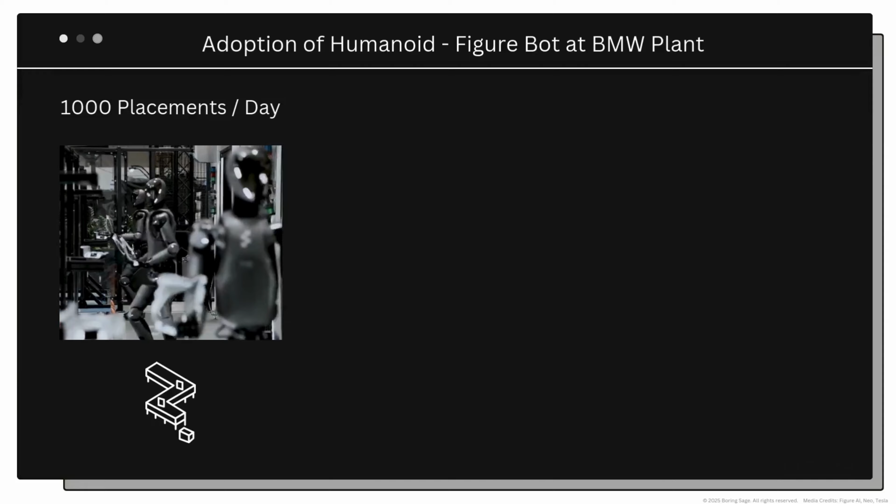From auto manufacturing plants to our homes, humanoids are gaining serious adoption. Here in the US, FigureAI bots are building the next generation of BMW cars. These are deployed in the Spartanburg auto manufacturing plant and are automating the assembly line at a galactic speed.

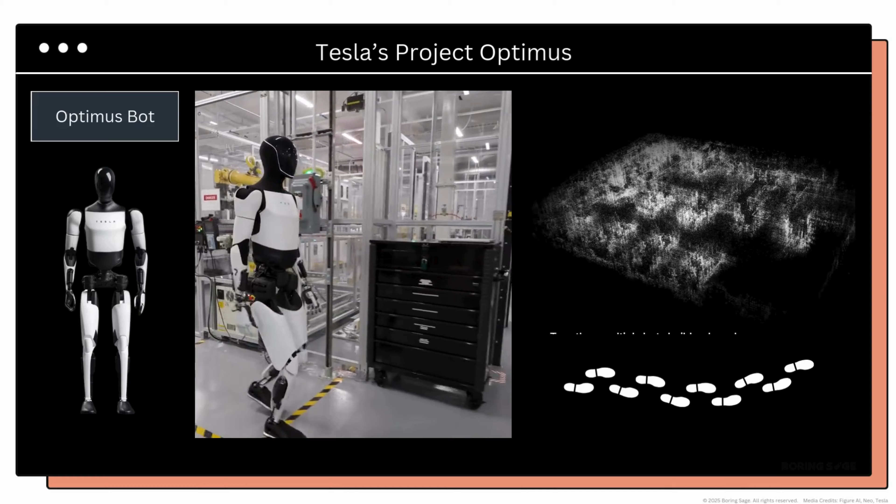Tesla is also joining the pack with its Optimus bot. It's being trained to automate the production line for the next generation of Tesla cars and the Cybertrucks. Germany, China, and South Korea are also leading this front with locally designed top tier humanoids.

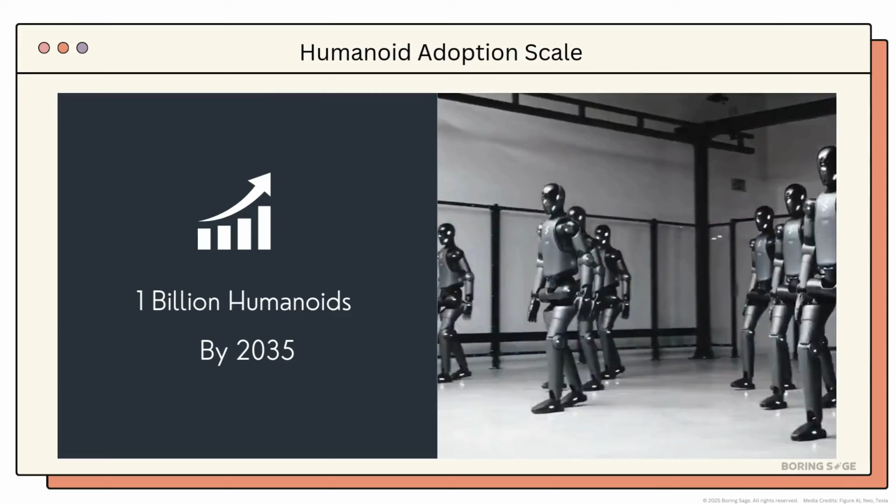It's estimated that around 1 billion humanoids will be deployed by 2035. 50,000 are expected to ship this year alone, each engineered by robotics teams around the world. Given this scale, it's worth understanding how humanoids work.

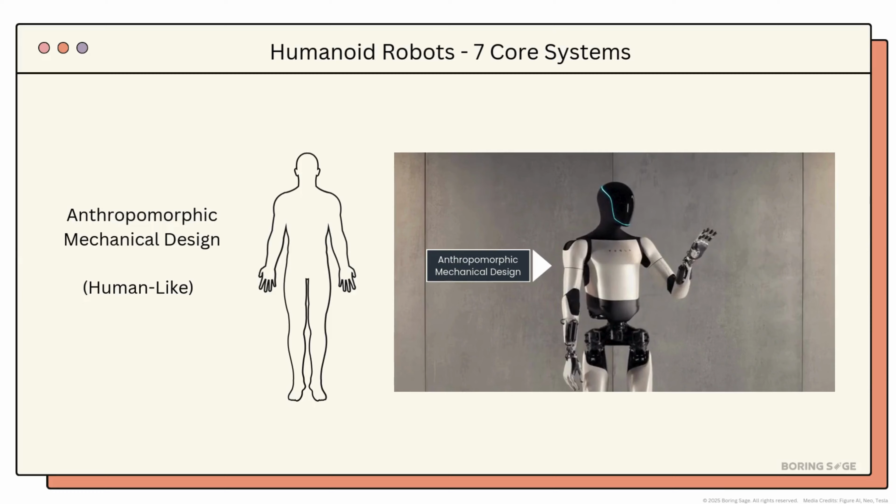If you take a look at humanoid robots today, you will notice their design and functionality can be distilled down to 7 core systems. What are these 7 systems? Let's cover each of them one by one. Well, the first one is anthropomorphic mechanical design, or in simple words, human body inspired mechanical design.

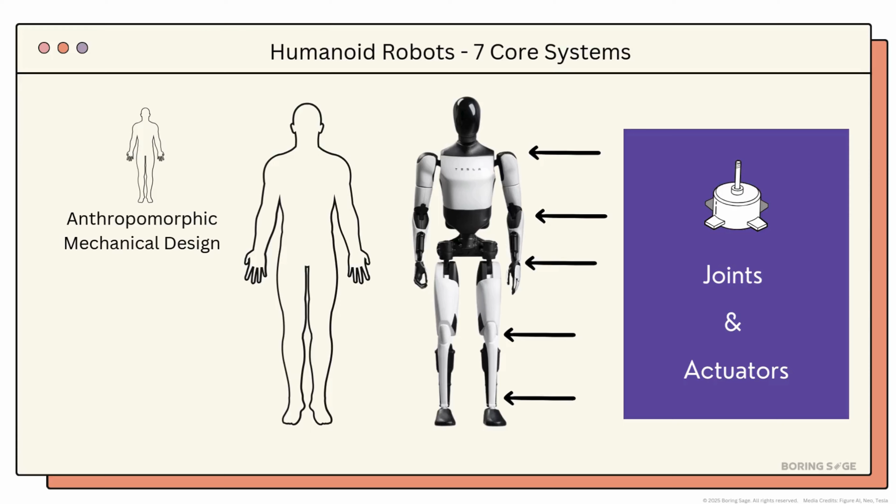At its core, a humanoid robot is built with a body plan inspired by our own. Each of these are equipped with one head, one torso, two legs, and two arms. Each limb is made up of multiple joints. These joints are powered by actuators, or in simple terms, high power motors that allow the robot to perform a wide range of tasks. To keep it simple, this mechanical design of a humanoid can be distilled into 3 subsystems.

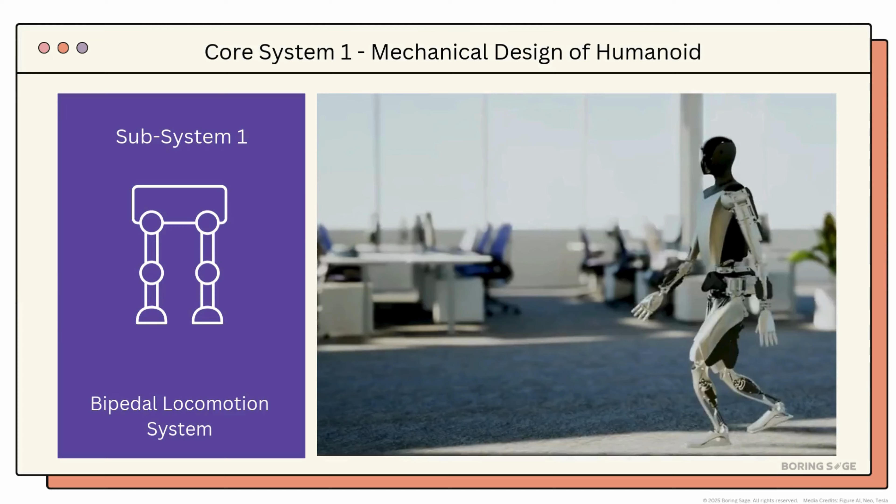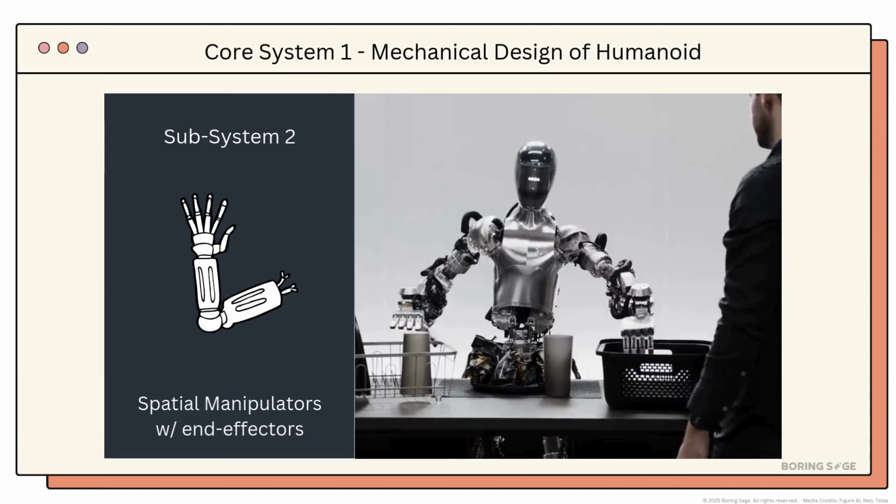The first one is the bipedal locomotion system, essentially a fancy way to describe the 2 legs that each of these humanoids is equipped with. The second subsystem covers the 2 spatial manipulators. These are essentially the 2 hands of the robot equipped with end effectors, or some call them grippers. A gripper is the technical term for fingers with human-like dexterity.

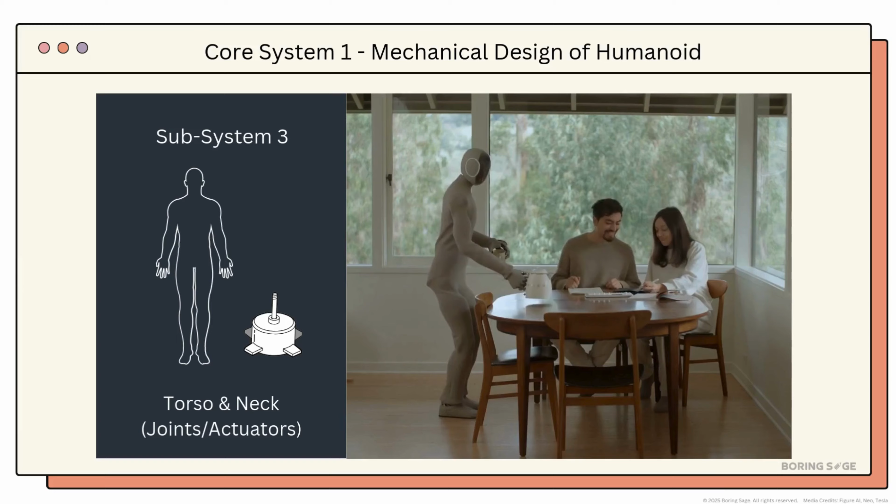Then, the third subsystem comprises the torso and the neck. Each of these subsystems are powered by actuators, or in simple words, high-torque motors. They play a key role in ensuring a humanoid has a reasonable range and stability. This mechanical architecture is carefully engineered for stability, endurance, precision, and agility.

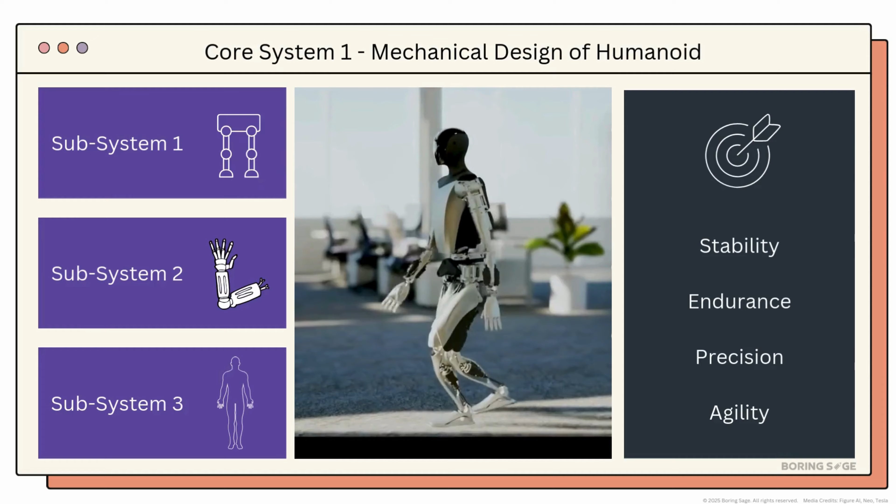Now that we understand the first core system, which is the mechanical design, we need to understand the second core system. Just because a humanoid robot is equipped with 2 mechanical legs doesn't mean it's going to be able to walk and retain its balance. It has to be trained to retain its balance. So the question is, how does it do that? How does a humanoid robot ensure that each step it takes is well calibrated so it doesn't fall?

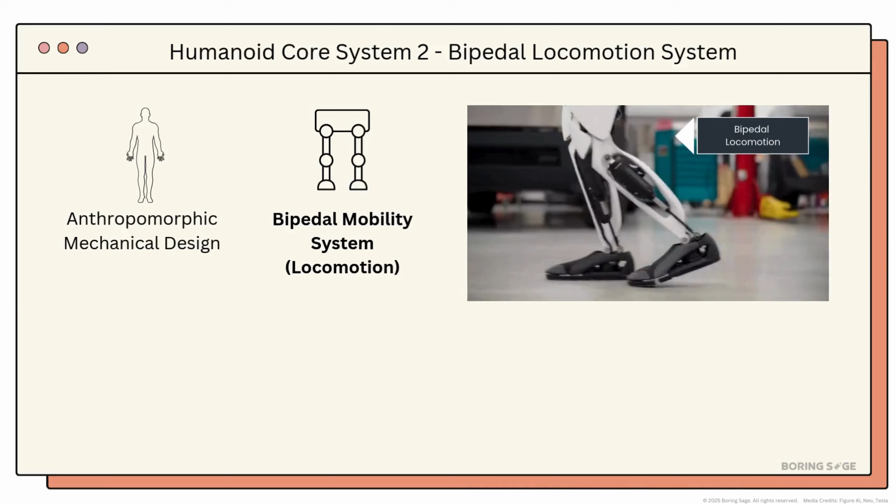That's where the second core system comes into play. It's also known as the bipedal mobility or the bipedal locomotion system. This system ensures that a robot remains stable. It does so by helping the robot understand the terrain profile it's navigating, the slope of the surface, and the center of gravity of the robot itself.

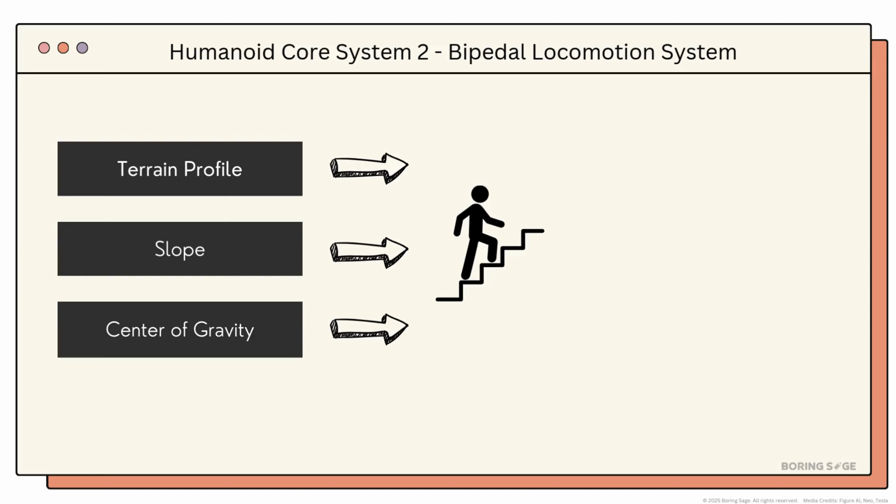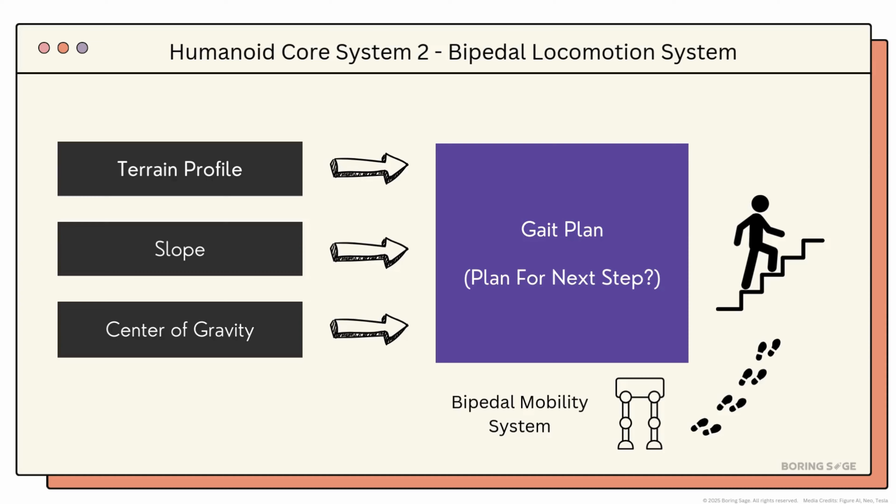These inputs allow the humanoid to decide what the next step should look like. We call this gait planning in the world of robotics. Basically, it means determining what kind of footstep pattern the robot will choose for the next step based on the current parameters for the current step. How does it do that? Well, there are 2 ways to approach this challenge.

One is to simply take the real-time data from sensors such as the force measurement sensors located on the feet, the cameras, and the IMU sensors. Then use this data to understand how the ground profile is changing. Based on these changes, a humanoid can respond by activating corresponding actuators or motors located around the legs. These actuators apply appropriate torque to ensure the robot has a firm grip on the ground. Some refer to this approach as a reactive approach.

An approach that is more proactive, on the other hand, relies on the principle of prediction, or in mathematical terms, computing probabilities for terrain profile based on historical data. So instead of just relying on the real-time data received from sensors for the current step, a humanoid scans the terrain, takes the current and the historical data from the past few steps, and then it predicts how the terrain profile is about to change. It then adjusts its next step or selects an appropriate gait. We call this gait planning in the world of robotics.

This ensures our locomotion system is aware of the current and the historic patterns the robot has encountered in the given environment. In simple words, it's a self-aware locomotion system. This core system too is fully responsible for retaining balance and ensuring the humanoid is able to move around in factories, warehouses, and homes with the highest levels of ground grip, precision, strength, and stability.

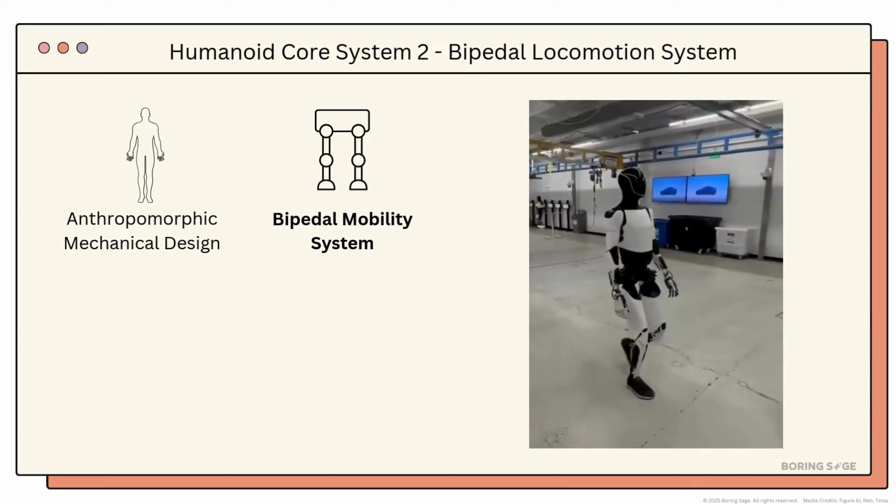Now you might ask, well, that's for mobile navigation. What about if our humanoid has to lift an object or pick an egg from a packet? How does it do that? This is where the spatial manipulators come in handy. A spatial manipulator is a technical term used to describe an arm with human-like dexterity, and an end effector is a technical term used to describe fingers or grippers that can be controlled electronically to grasp an object.

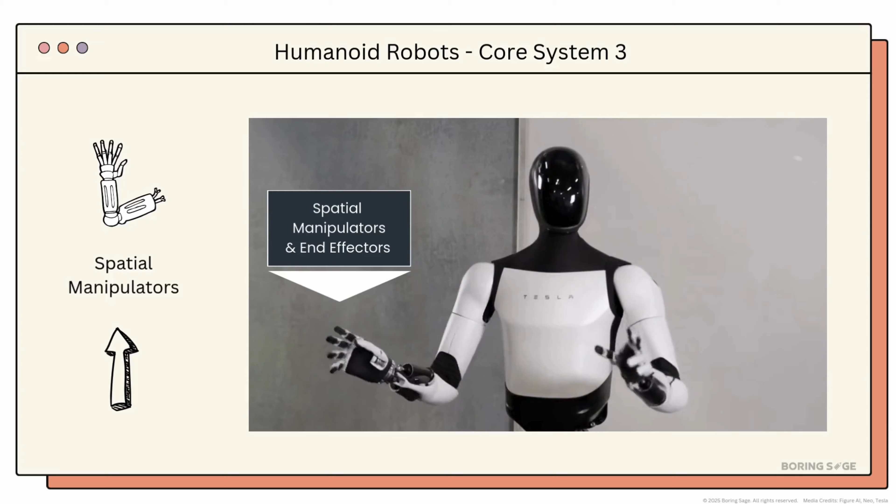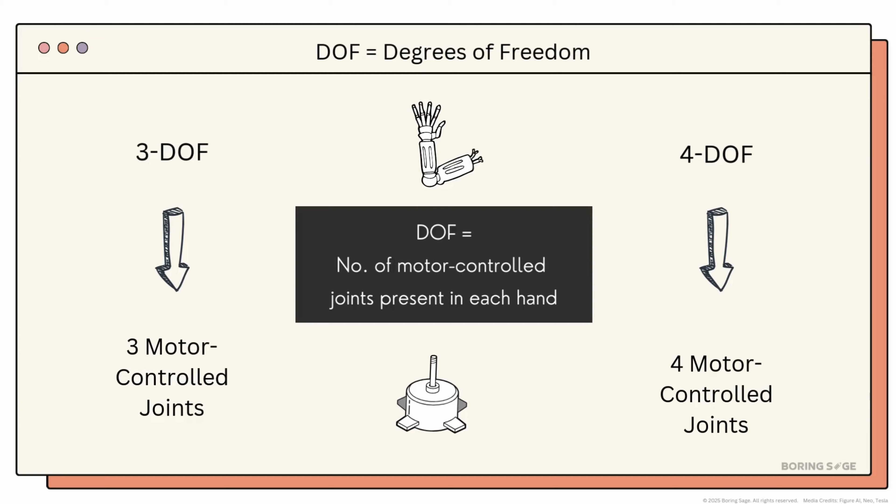Most humanoids today are equipped with two spatial manipulators, each equipped with a strong end effector. From a mechanical perspective, these are essentially metal parts or limbs powered by high-torque motors that provide a range of motion. We refer to this as degrees of freedom in robotics, or DOF. So if you hear folks say 3DOF or 4DOF, just know that that means those are the number of motor-controlled joints present in each spatial manipulator.

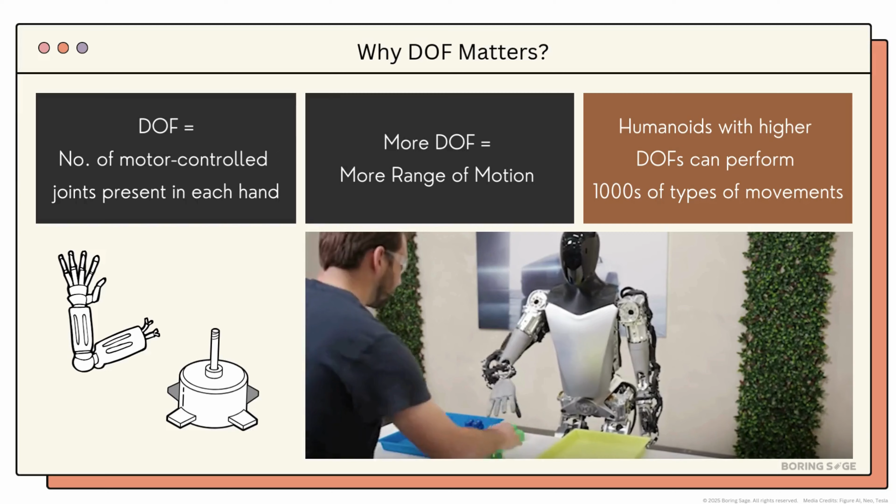Why does that number matter? Well, if a humanoid arm has more joints, that means each of these joints can be moved in different directions and at different speeds. Hence, a humanoid can potentially perform thousands of types of movements. In simple terms, more DOFs means more range of motion, and that means ultra high capabilities for our robot.

We humans have 7 degrees of freedom in each arm. That means we have 7 core joints. 3 of them are located in the shoulder, 1 in the elbow, and 3 in the wrist. DOF choice for humanoids is inspired by us humans.

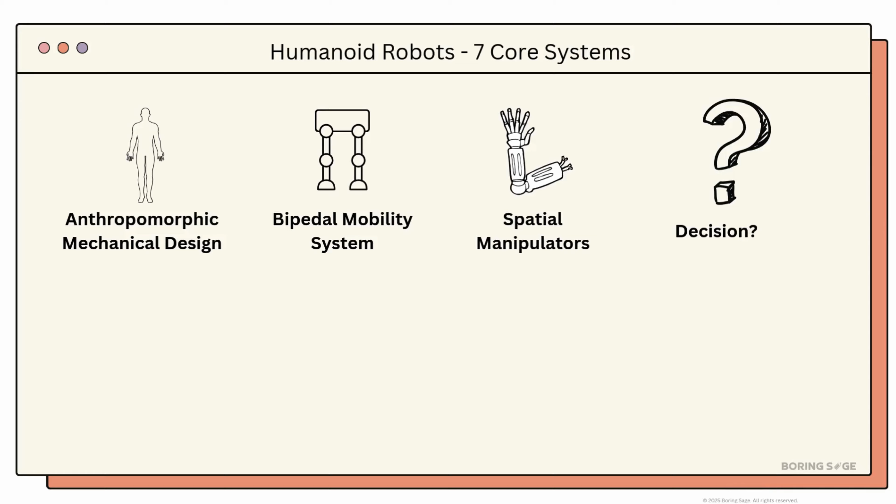Now that we have covered the first 3 core systems, the question is, how does our robot make decisions? How does our humanoid know how to move these spatial manipulators to pick an object? Objects come in different shapes and sizes. An apple is different from a car part that a humanoid may have to move on an assembly line. So, how does it make sense of these objects in the real world?

That's why we need sensors and the perception system. It's the fourth core system of our humanoid stack, and essentially the robot's way of understanding its surroundings and making well-calibrated decisions. Question is, how does it work?

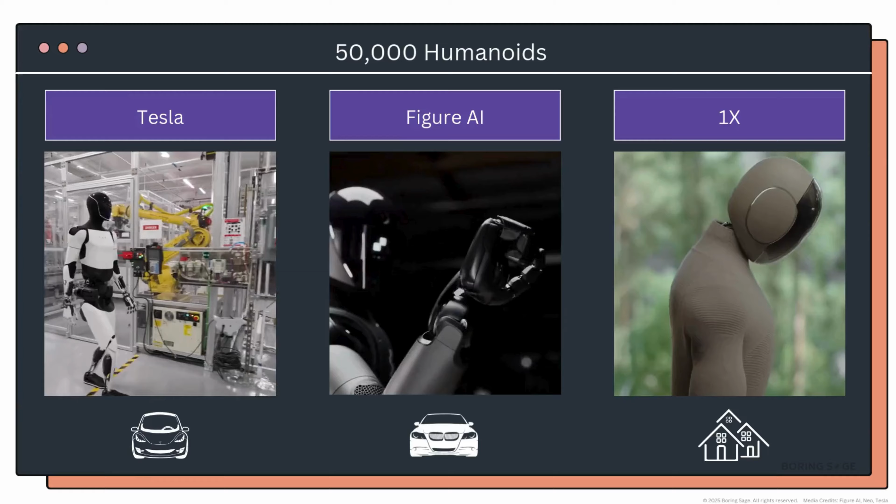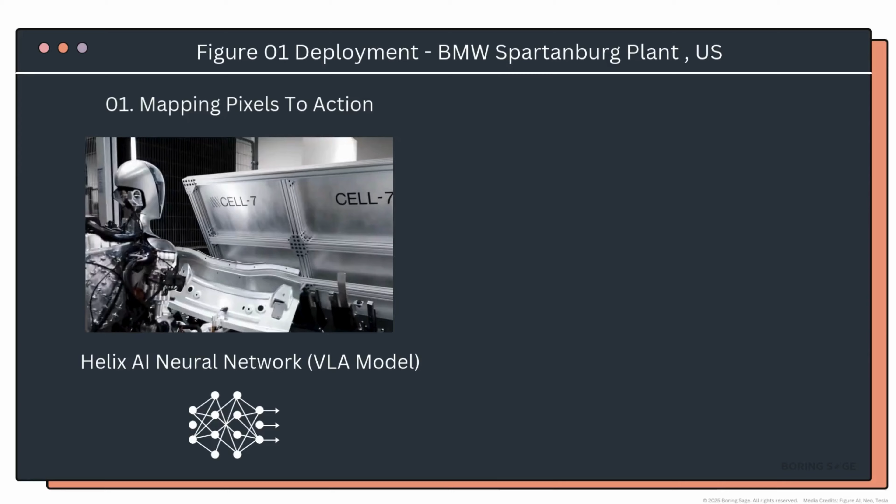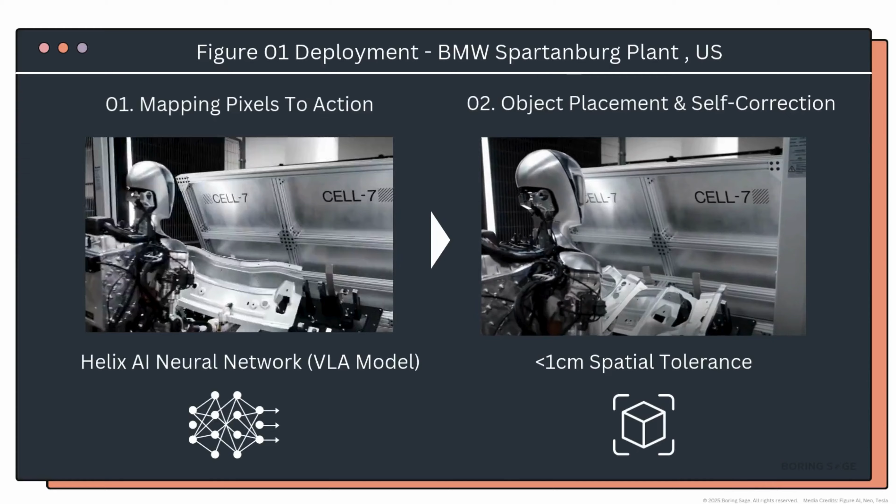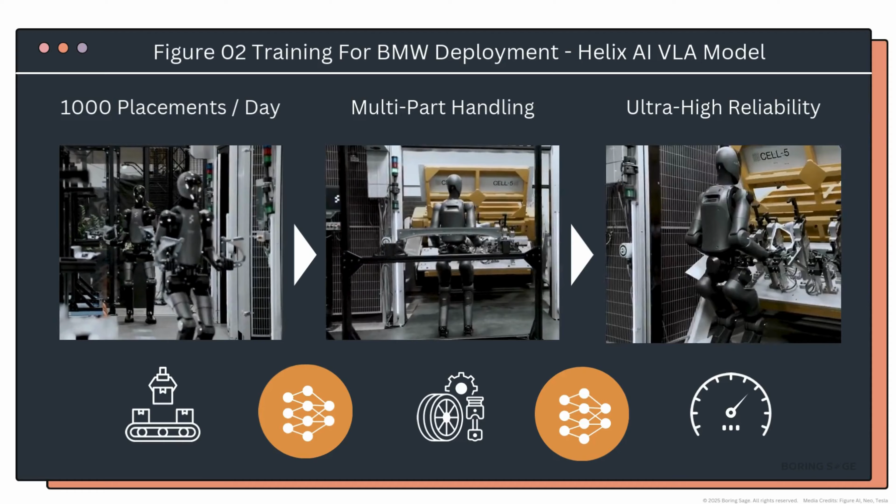Over the next few months, the FigureAI team analyzed the performance data from this trial and optimized the underlying AI model used to train this bot. This led to the launch of the Figure 02 bot at the same plant. Some of you might be wondering, what exactly did the Figure 02 bot accomplish during this trial? During this trial, FigureAI was primarily responsible for automating the chassis assembly process. It was tasked with placing metal parts into specialized fixtures which would then be assembled as a part of the chassis for the next generation of BMW cars.

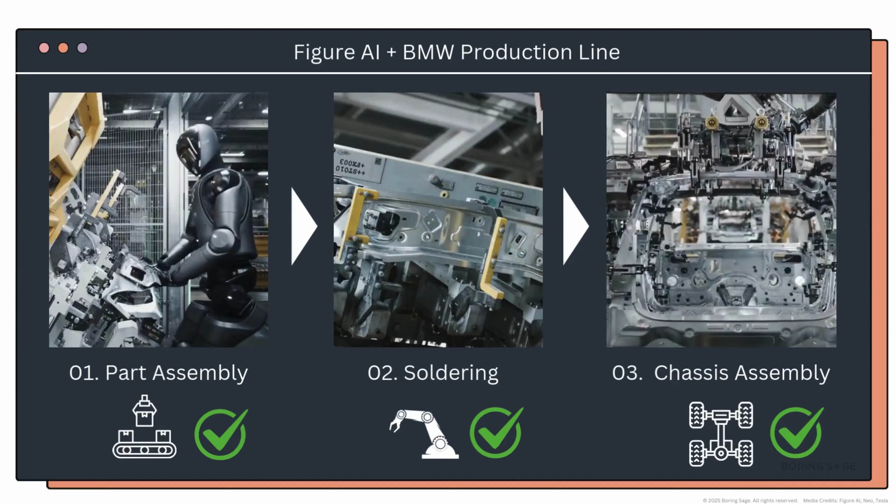So, did it pass the test? Yes, it did. During this trial, it demonstrated not just spatial precision down to the centimeter level, but also extremely high dexterity using its 16 degrees of freedom human-scale robotic hand. For BMW, this trial is a part of its broader iFactory initiative, a forward-looking program focused on building smarter, agile, and more sustainable auto manufacturing plants. In this context, humanoids are being evaluated to handle tasks that are awkward, tiring, or ergonomically risky for human workers.

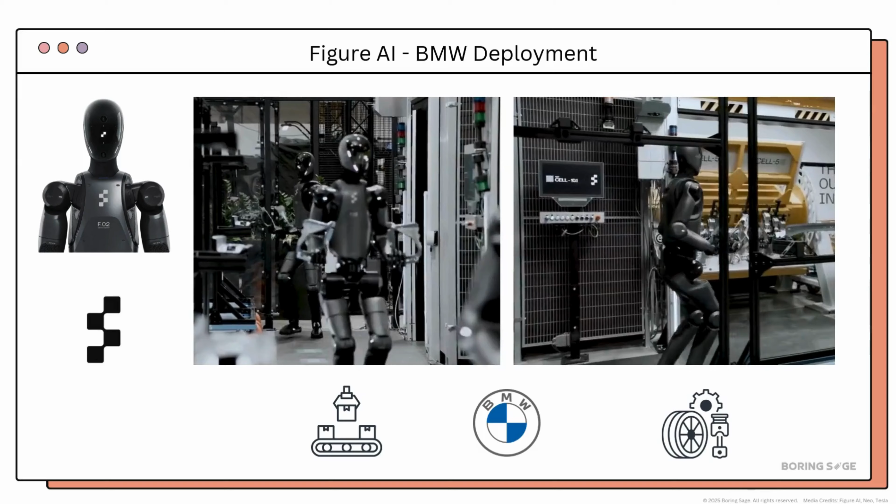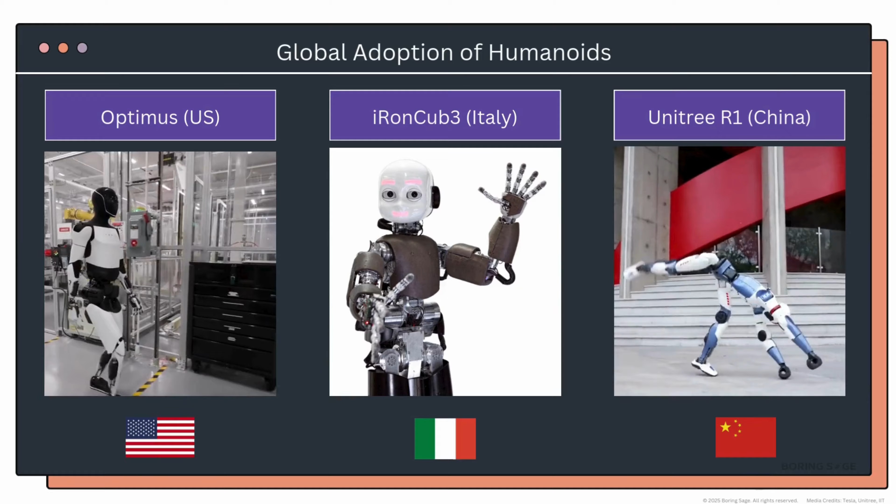Beyond auto plants, humanoids like Neo are also getting trained to serve as home assistants. Developed by the 1X team, Neo is designed to assist us humans with our daily chores and make us more productive. Neo is not the only one leading this front. If you look around the world, Optimus in the US, R1 in China, and iRonCub3 in Italy are just a few examples of humanoids that are being trained to help us both in our factories and at our homes. Over 50,000 will ship this year alone, and about 1 billion are expected to inhabit Earth by 2035.